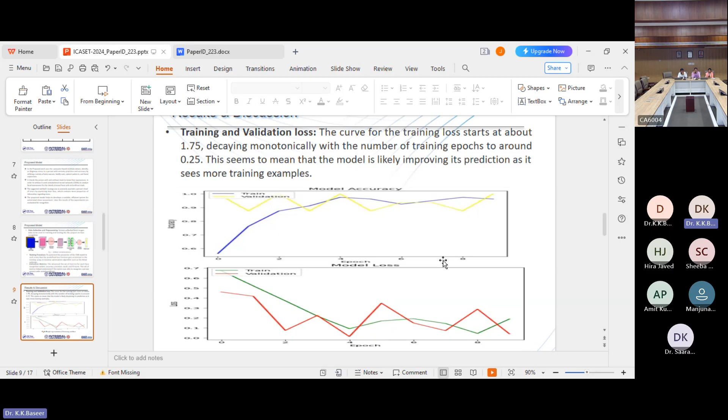And the next one is the experimental results, which we discussed earlier. CNN demonstrates robustness and performance across various evaluation metrics, and what we proposed has better effectiveness. It provides a very low test loss of 0.321, and the accuracy is much better, 0.89 when we tested in our system. Overall, we are getting an average accuracy of 85%

in the performance test. And this is the architecture we used in our programming and experimental results, where we consider the different parameters and the shapes of the images, meaning different poses of the image, using with-mask and without-mask images, which helps us get the pooling, dense layers, and flatten.

Please conclude your presentation. Yes, please. We're running out of time. Sorry.

So what I want to conclude is that using the CNN model alone is not efficient, sir. But when you join CNN along with SSD, it provides better results, and we can use state-of-the-art architectures and optimization techniques, which will serve as a benchmark for novel insights in the field.

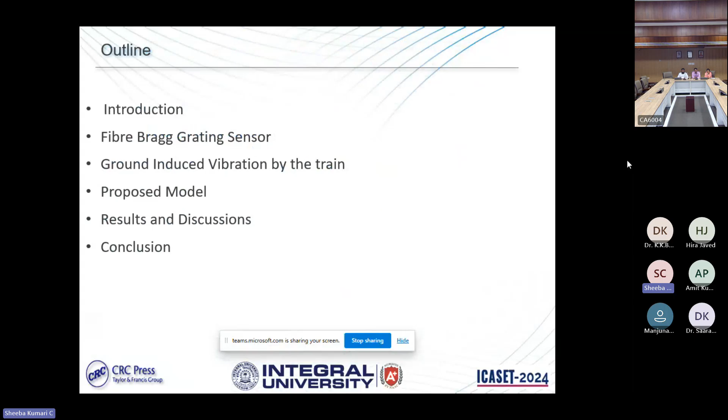The outline of my paper is the introduction, fiber Bragg grating sensor, my problem statement, ground-induced vibration by the train, the proposed model, results and discussions, and the conclusion. First, let me give the introduction.

In a densely populated nation like India, railways are considered the most used and cost-effective long-distance transport system. India is considered the fourth largest railway network because it covers more than 140,000 kilometers of railroad. So we have a very strong railway infrastructure, which plays a crucial role to ensure the continuity of goods and passenger transportation. Since most of the common people and a huge population depend upon this railway transport, the railway requires continuous health monitoring for safety concerns.

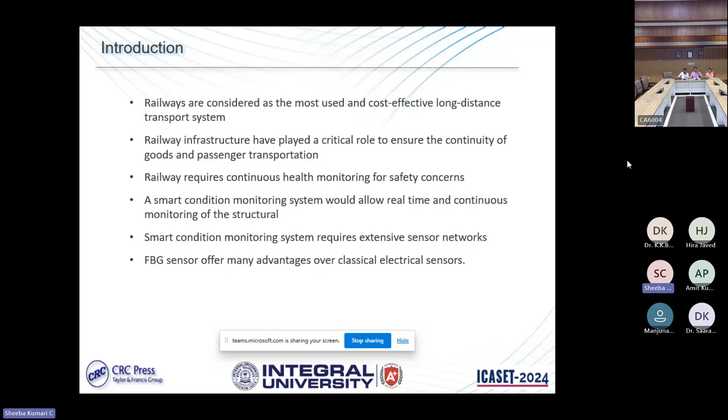In order to address the safety concerns, it is good to have a smart condition monitoring system, which would allow us to do real-time and continuous monitoring of the structural system of the railways. The smart condition monitoring system requires an extensive sensor network. So one option we go with is the FBG sensor, which offers many advantages over classical electrical sensors. Since my focus is towards FBG, let me give a brief description of the FBG sensor.

FBG is a type of distributed Bragg reflector constructed in a short segment of optical fiber that reflects a particular wavelength of light and transmits all others. A short segment of the optical fiber is exposed to high intensity ultraviolet rays, and the refractive index of those regions is changed. When we pass light through the core of the fiber, all the wavelengths except the Bragg wavelength will be transmitted. The reflected wavelength is the Bragg wavelength, which is given by the formula 2n effective capital lambda.

This FBG is used for measuring strain, pressure, temperature, vibration, and many other physical parameters. The advantages of FBG are that it is very immune to electromagnetic interference, it's lightweight, small, very flexible, and has high accuracy. A little more about the fiber Bragg grating sensor. This is the equation for calculating all the physical parameters: lambda B is equal to 2n effective capital lambda.

This Bragg wavelength is determined by various factors applied to the FBG, which affect the refractive index or the grating periodic variation. The grating period or the effective refractive index varies with either temperature or strain, and hence there is a shift in the center Bragg wavelength. So the sensitivity of the FBG is very high. If the center wavelength is 1550 nanometers, the strain can be measured as 1.2 picometers per microstrain, and 13 picometers per degree centigrade for temperature.

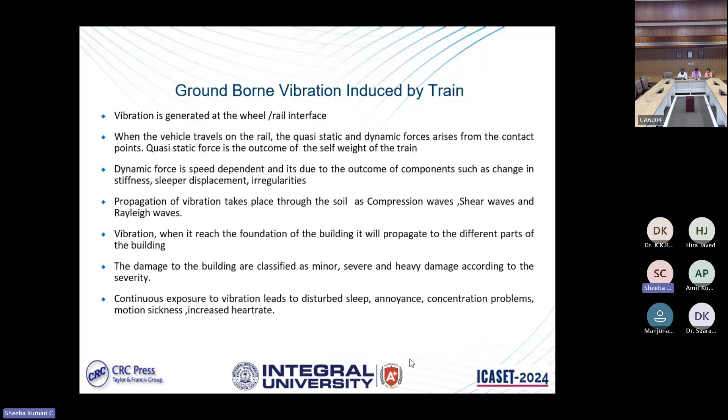Then the vibration reaches the foundations built near the railway tracks, and it affects different parts of the building. Not only the building, the people housed inside the building will also be affected by the vibration. So vibration affects both human beings and the buildings constructed in and around the railway stations. Due to growing populations, we can see high-rise buildings near railway stations in urban areas. It creates many problems for human beings, like sleep disturbance, annoyance, loss of concentration, motion sickness, and increased heart rate.

So my focus is to design a vibration sensor to measure the level of vibration produced by the train, and then determine whether this vibration is normal or if there are any abnormalities in the train. For that, my proposed model is the design of an FBG as a vibration sensor. I pasted the FBG on the railway track of a laboratory model train, and the wavelength shift is recorded in the time domain. I converted the time domain signal into the frequency domain by FFT in MATLAB. Then I could observe the difference in the vibration level.

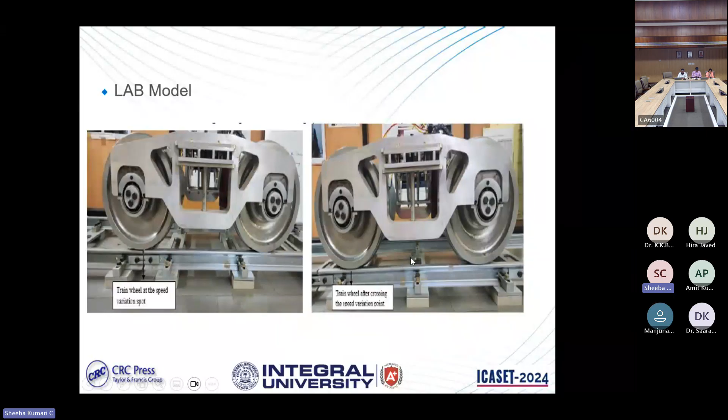Pardon, sir? Can you hear me? Yes, please go on. Yes, sir.

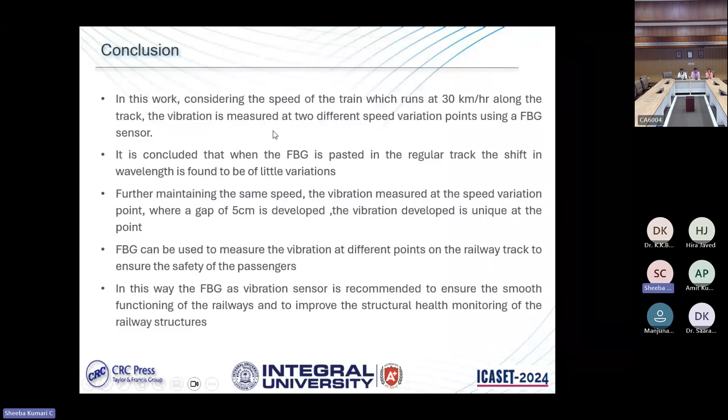So what is my conclusion? Along with our guides, we came to a conclusion that when the train is running on the normal track, the vibration is less. And when it is crossing some gaps, or it may be a crack, or some disturbance is there, then the vibration produced by the train is more. This is my finding from the experimental model. Thank you, sir.

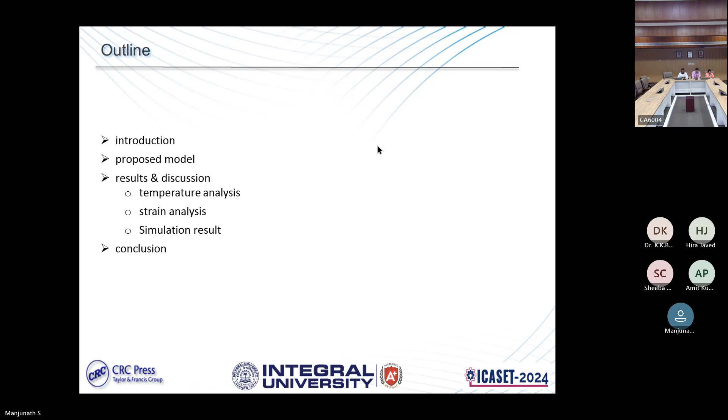Among optical fiber sensors, FBG technology is unique due to its simple manufacturing process and strongly reflected signals. The fiber core refractive index varies regularly along its length to form FBGs. These sensors work using the diffraction grating concept, which involves periodic changes in the core refractive index. If the Bragg condition is met, light passes through the grating structure and reflects off each grating plane, creating a reflected beam of light.

The following equation represents this condition, where lambda B indicates the Bragg wavelength, n effective is the effective refractive index of the core, and capital lambda denotes the period of the grating. Any changes in the period of grating or the effective refractive index of the FBG due to pressure, humidity, temperature, strain, etc. cause a shift in the wavelength of the reflected light.

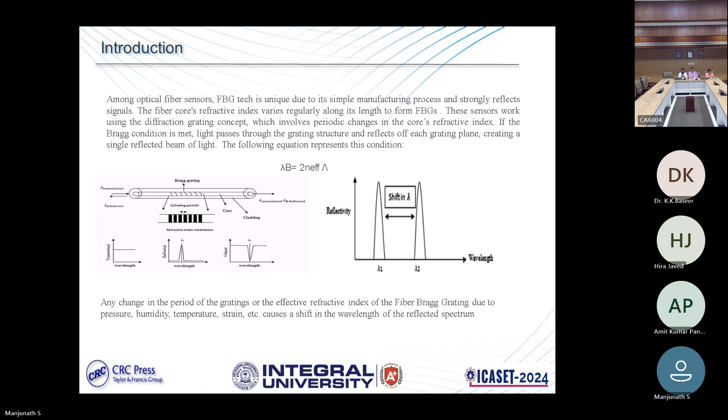Proposed model. So here we are using our helical structures to mount our FBG. The FBG sensor embedded in the helical structure connects the interrogator to an optical channel for analyzing parameters like strain and temperature. The analysis can be performed using Origin Pro software.

Implementing a helical structure with the optical fiber that connects the FBG presents distinct advantages for application in sensing. These advantages include higher sensitivity towards strain and temperature, attributed to the grating distributed along the helical path. Moreover, the helical structure possesses the capability to improve the sensor resilience against bending and twisting, thereby enhancing its durability when subjected to changing operational environments.

Results. Temperature analysis. Temperature sensing is the most widely used parameter in practically all application domains. Conventional temperature sensors such as thermocouples and resistance temperature detectors have a large operating range. So we are using a fiber Bragg grating so that it is very compact, very trustworthy, and very immune to electromagnetic interference. The thermo-optic coefficient is the main reason why FBG is temperature sensitive.

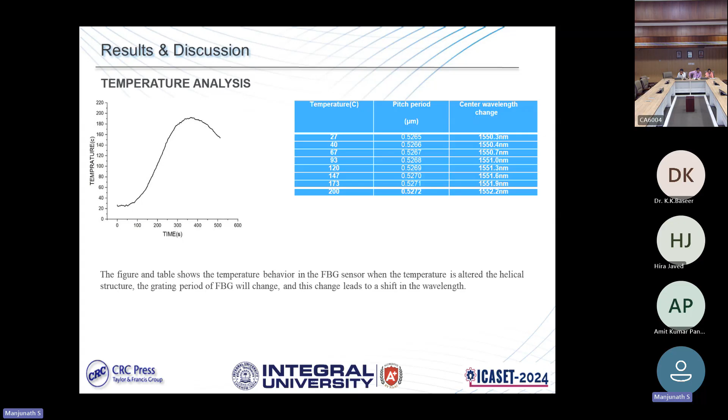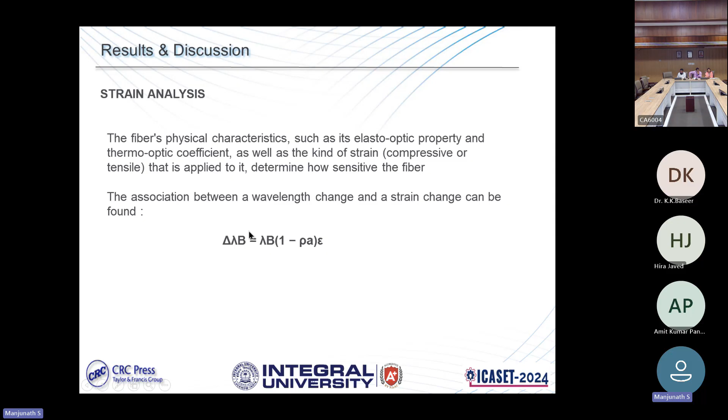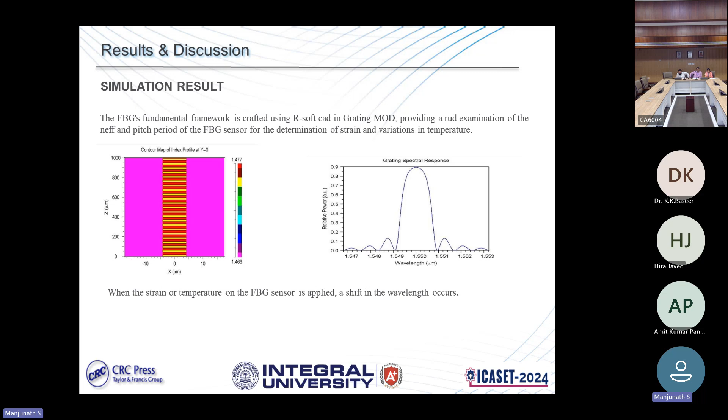The strain equation indicates that epsilon, delta L by L, is nothing but the change in the length applied to the tip of the helical structure due to the initial alteration in its length. So we can see a shift in the wavelength. This we also simulated using RSoft CAD in the Grating MOD. As we can see, when there is a strain or temperature applied on the FBG sensor, we can see a shift in the wavelength. So this is the simulation result. We have used

MATLAB to plot the strain versus pitch period change, and we also used the temperature versus pitch. As we can see, as the temperature increases, we can see a shift in the wavelength. Also, as we see a shift in the strain, we can see a shift in the wavelength.

So our conclusion is a high sensitivity FBG with sensitivity enhancement achieved through a helical structure. So we have utilized the helical structure to enhance the sensing capability of FBG. The helical structure demonstrates the ability to strengthen the sensor resistance to bending and twisting, consequently improving its longevity. Using RSoft, various FBG parameters such as grating length and pitch period are simulated.

The proposed model exhibits excellent sensitivity comparable to the standard sensitivity values. We obtained 10 picometer per degree centigrade for temperature and 2.2 picometer per change in epsilon for strain, ultimately decreasing the sensor response time. Moreover, this design model has the capability to precisely measure both strain and temperature.

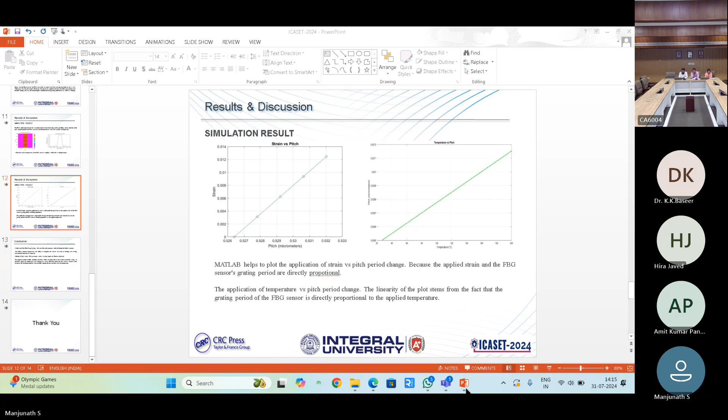Mr. Manjunath, hello. Yes, sir. Can you come to the slide where your graphs are? Yes, sir. The slide before this? Yes, previous slide? Yes, this one, sir. So what is on the x-axis? What have you plotted on the x-axis? Sir, it's time, sir. And on the y-axis? The y-axis is temperature, sir. So we have given a temperature of 20 to 220 degrees. 140-degree temperature you are talking about, and you are talking about time in seconds. Yes, sir. So where does this time come from?

Sir, actually, while taking data from the interrogator, we get the data in time format. No, in the slide you have mentioned pitch period and center wavelength change. Yes, sir. In this table, time is not mentioned. Where does this time component come from? So actually, while taking data from the interrogator, we get data in time only, sir. But it is not shown in the table. Yes, sir, it's not shown. Your graph and your table are not matched. Both are telling a different story. Yes, sir.

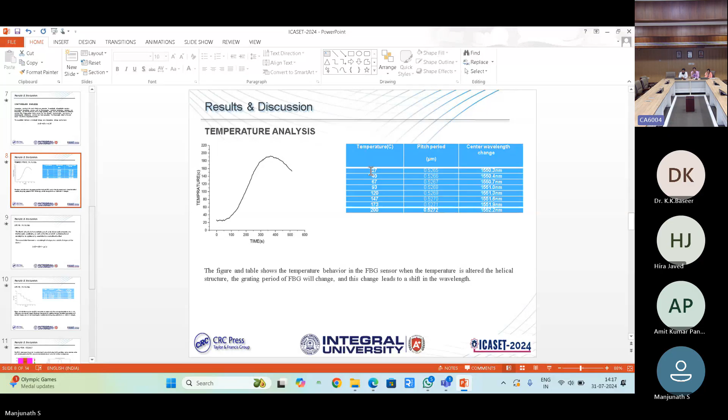There should be some coherence between the table and the graph that has been shown. Now, can you come on to the next slide, please? Yes, sir.

Or you can take any time you want, you should write the time in whatever way you want to say, whatever you want to show, just to show in a table form, right? Yes, sir.

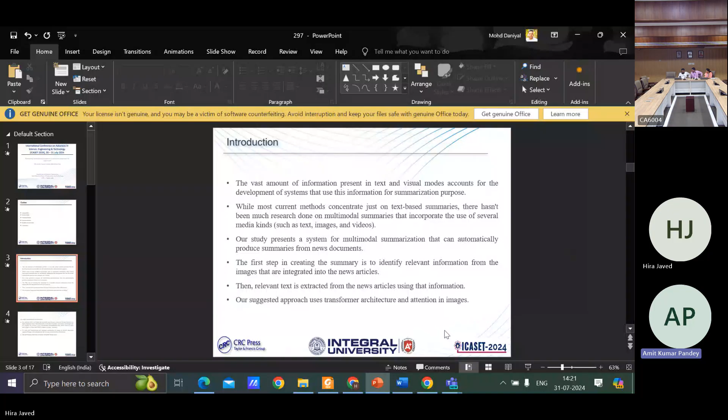Yes, I'm sharing. Visible, sir? Yes, it's visible, please start your presentation. Okay, good afternoon everyone. The topic is Summarizing Across Modes, Integration of Asynchronous Images and Text.

My paper ID is 297 and I'm from the Department of Computer Engineering, Zakir Husain College of Engineering and Technology, AMU. So this is the outline of my work, which includes the introduction, related work, proposed model, implementation and all.

So basically the introduction is that we have a vast amount of data that is there in textual and visual modes. And when we summarize, we generally use the data in the textual form. But with the increase of multimodal content, the amount of information that is there should also be used for generating the summaries.

So this study presents a system for multimodal summarization that can automatically produce summaries from news documents by using different modes. So we have used the textual mode, and we have also used the visual mode here for the generation of summaries. So the relevant text is extracted from the news articles using this information, and our approach uses the transformer architecture and attention in images for the generation of the summaries.

So the main contribution is to bridge the semantic gap between text and images. Text is one mode and image is the other mode, and we need to have some semantic understanding of the image in order to generate the summary from the image also, in order to capture the information from the image, and that will result eventually in the formation of the summary.

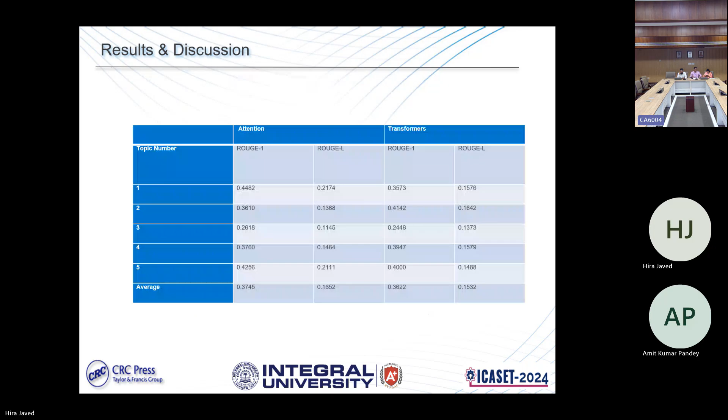Previous slide, please - no, previous this one, right? Yes. What is loss function and how is it different from activation function?

So loss function is used to measure the difference between the predicted and the actual value. Activation function is used in case of neural network, so it is the ReLU function that has been used. And batch size is also small in your case, isn't it?

There was this limitation, 32 or 64, because the size of the dataset is 8,000. So we use the batch size of 64 here. Why are the number of epochs only 50?

Sir, actually it takes a lot of time. I had to compare the results, so what I did was I tried, but it takes a lot of time because there's processing of image also and text also. For the comparison purpose, what I did was I limited it to 50. I can increase it also, but for now, it took several hours, so there was some resource required.

What is this optimizer? This optimizer is used for optimizing the neural network that we used, right? Most of the parameters are same in both the cases.